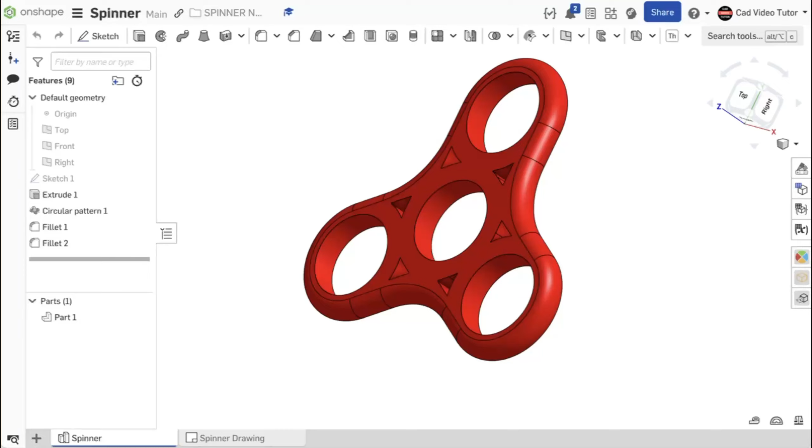This video provides easy-to-follow instructions for you to create this spinner using Onshape.

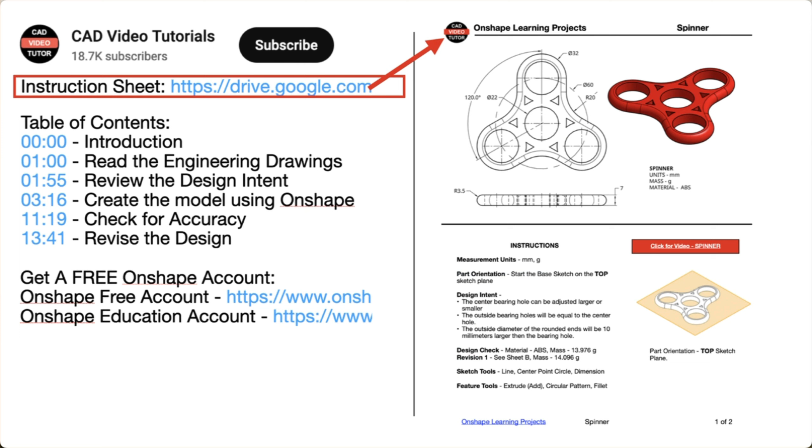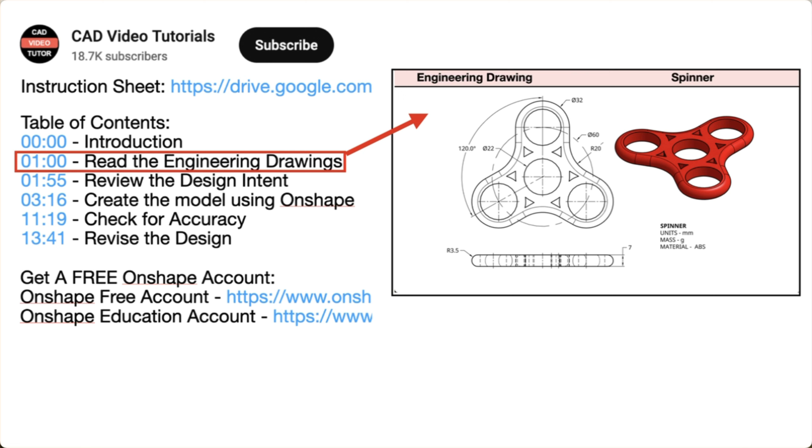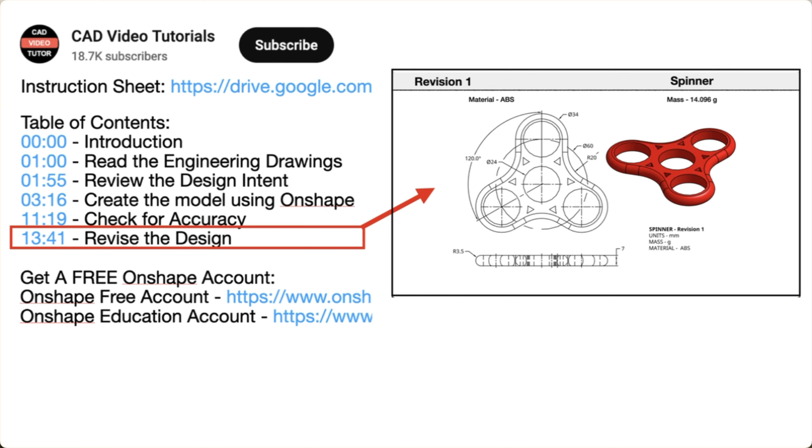The video instruction is organized into 5 segments. In Segment 1, you will read the engineering drawings. Segment 2 will establish the design intent. In Segment 3, you will create the part model using Onshape. Next, you will check the accuracy of your model by checking its mass properties. Last, you will check the design intent by making changes to the model to see if it will update correctly. Now you are ready to begin the project.

In this segment, we'll read the engineering drawing for this spinner. Let's start by identifying the views provided in the drawings. First, there is an isometric view showing the spinner as a 3-dimensional pictorial. Next, 2 orthographic views. On the lower left, a front view. Projected directly above the front view is a top view.

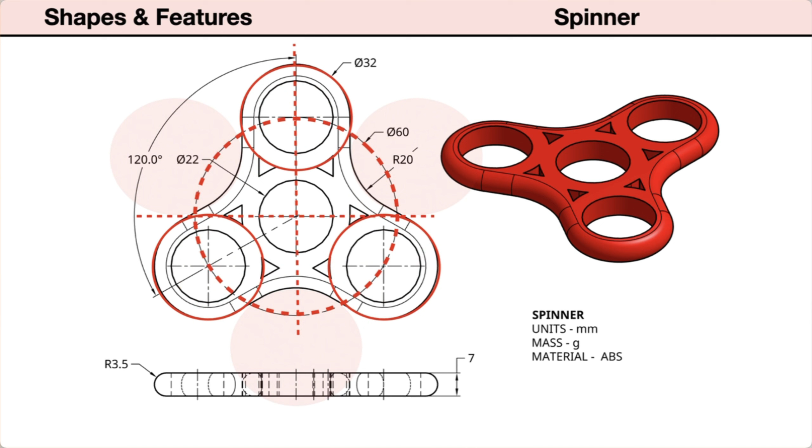When creating the parametric model, we need to identify the basic shapes and included features. The top view shows the part as a circular pattern with features concentric to the center. Located at the center is a circle. Patterned evenly about the center are 3 sets of concentric circles. The outer circles are joined by tangent arcs. The hidden lines in the front view show all of the holes extending through the body. It also shows that the spinner has a uniform thickness, and the outside edges are fully rounded.

Next, we'll look at the dimensions and notes. First, the dimensions are in millimeters. The diameter of the small circles are all 22 millimeters. The outer circles have a diameter of 32 millimeters. The centers of the outer circles are coincident to a center line circle with a diameter of 60 millimeters.

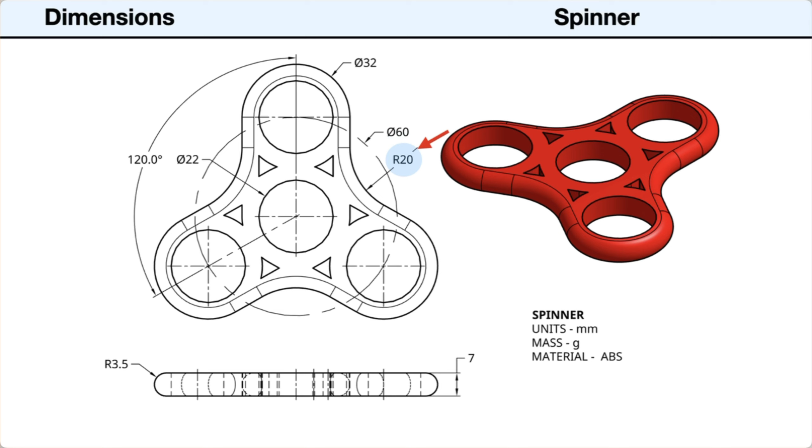The outer tangent arcs have a radius of 20 millimeters. The thickness is 7 millimeters. The fillet on the outside edge has a radius of 3.5 millimeters. The material is ABS plastic. The mass is measured in grams.

Next, let's establish our design intent. To start, we need to identify any features that might be changed or revised during the design process. The center bearing hole is sized at 22 millimeters to fit a standard ball bearing. The outer holes are sized the same so that they can also be fitted with bearings to add weight and momentum for spinning. We might need to use a different size bearing, so this diameter might need to be changed by a few millimeters. This means that all of the bearing holes would then have to be changed.

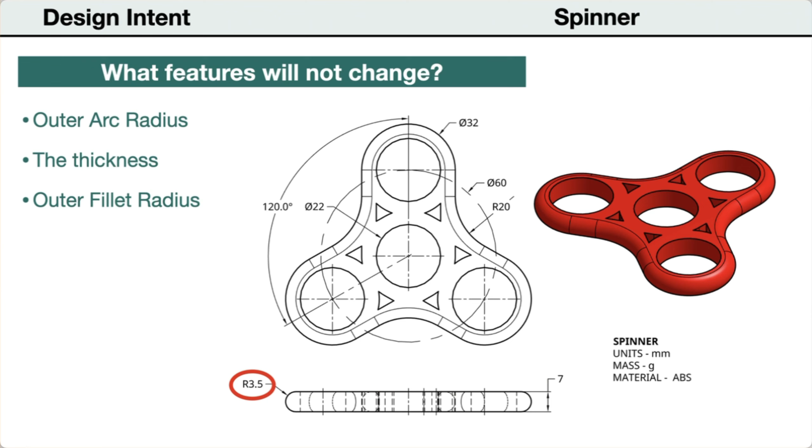If the bearing hole size changes on these outer holes, then the concentric circles would need to change by the same amount. Other features should remain unchanged, including the outer arc radius, the thickness, and the outside fillet radius. So we should be able to adjust the size of the bearing holes, and the other features will update without errors.

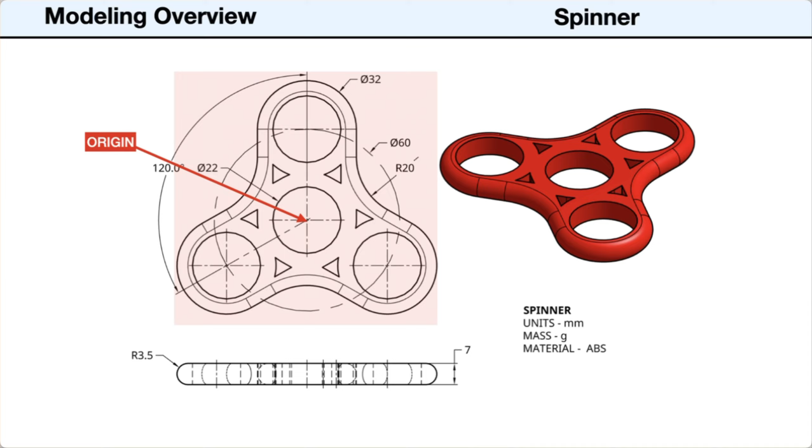Before we model the part in Onshape, let's preview the steps we will use in the modeling process. First, from the drawing, we will identify the profile we will use for the base sketch. In this project, the top view defines most of the elements of the design, so we will use it for the base sketch. Because this part is concentric to the center, we will use the origin at the center of the sketch. So sketch 1 is placed on the top sketch plane and defines the center hole and one set of the pattern elements. Extrude 1 will add the thickness.

Circular pattern 1 will duplicate and add the additional features around the outside. Fillet 1 will add the arcs to the outside. Fillet 2 will round over the outside edge. Now let's get started modeling the spinner.

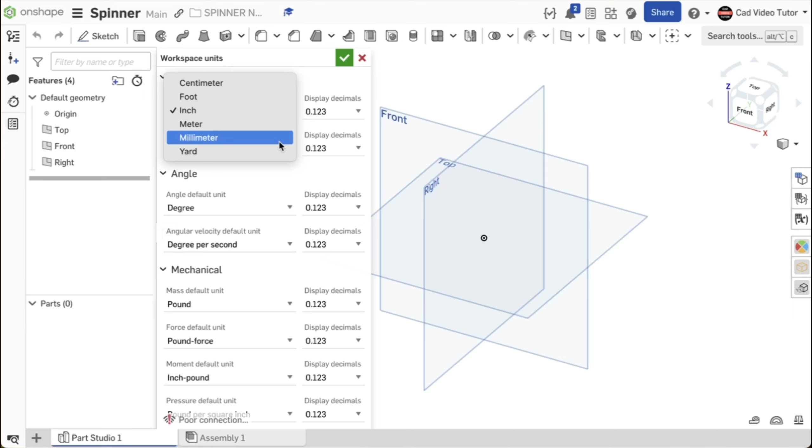I have started a new Onshape document and named it spinner. The workspace units are set to millimeters and the mass is set to grams. Start a new sketch and click on the top sketch plane. Use N on the keyboard to view normal and P to turn off the planes. I will start by sketching a center point circle concentric to the origin. Set the diameter at 22 millimeters. This is the size of the bearing hole.

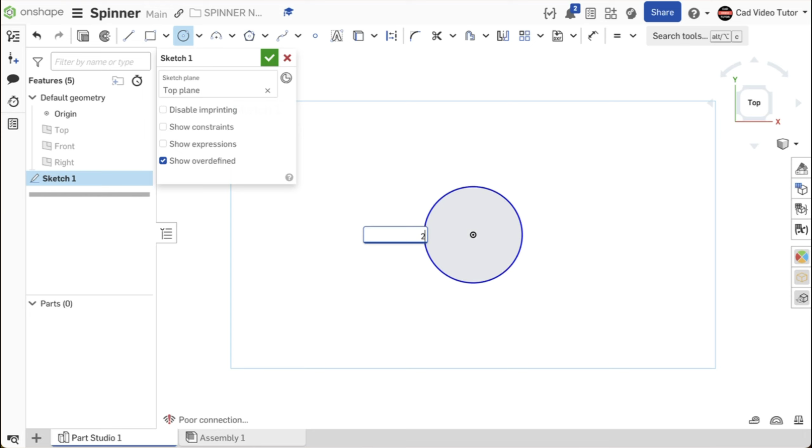Create another larger concentric circle. This diameter is 32, but I want to set its size to change if the inner circle changes. To do this, use the dimension tool and set the distance between the inner circle and outer circle at 5 millimeters. Now, if I change the diameter of the inner circle, the outer circle will automatically update by the same amount. The dimension of the inner circle now drives the diameter of the outer circle.

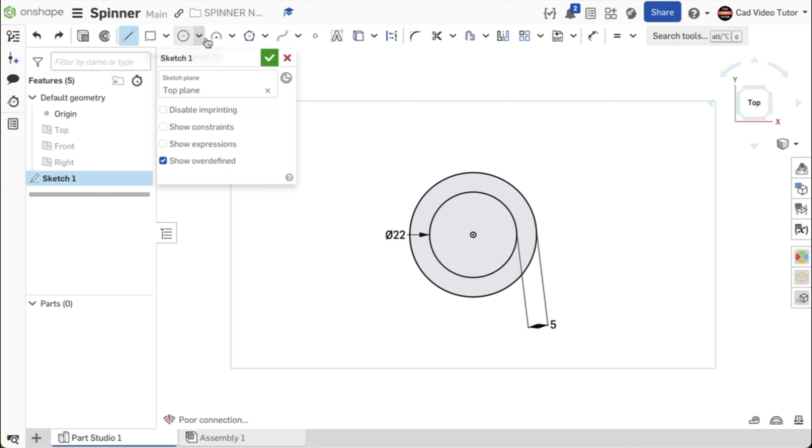Next, use a construction line to set the distance between the origin and the location of one of the pattern features. Make sure the line is vertical. Set the length to 30 millimeters. Now draw another set of concentric circles coincident to the end of this line.

To drive the diameter of these circles with the existing set, use an equal constraint from the constraint menu and click first on the dimension circle and then the outer circle to set it equal. Now, if I change this diameter of the center bearing circle, it drives all the circles. This will satisfy my design intent.

Now we need some single lines. The line should start coincident to this circle and horizontal to the center. I see both icons, so click to start the line. The line should end at the same point on the circle.

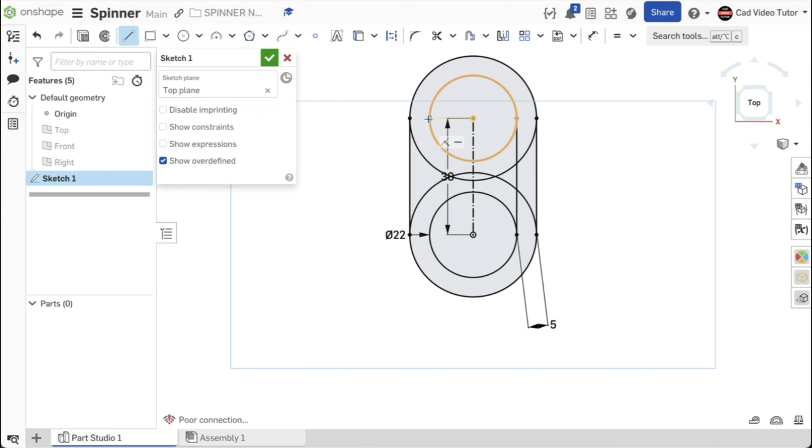If you click and hold the mouse button down, then drag to the line's ending point and let up on the mouse, it draws a single line. This is the fast way to draw separate line segments without having to start and stop the line tool. All the lines have turned black and the sketch is finished. Use the green check to accept.

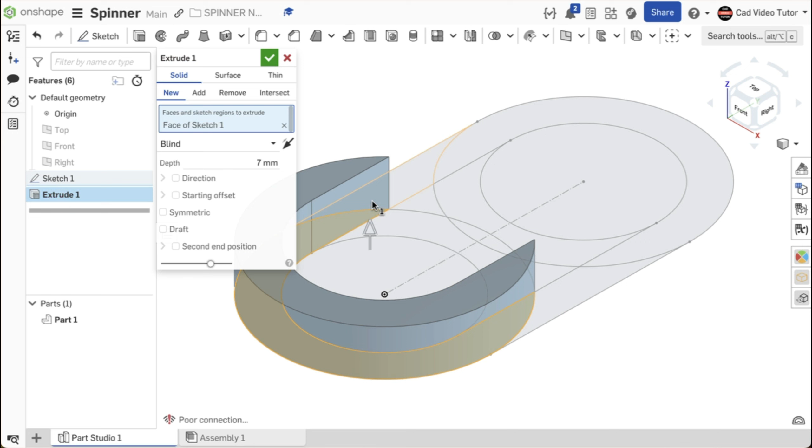Now we can extrude the regions of the sketch to create the base feature. Click on the Extrude tool on the feature toolbar. Set the depth to 7 millimeters. Click on the regions of the sketch that will be included in the base feature. If you accidentally click on a region you don't want included, click on it again to deselect it. This looks correct, so use the green check to accept the part.

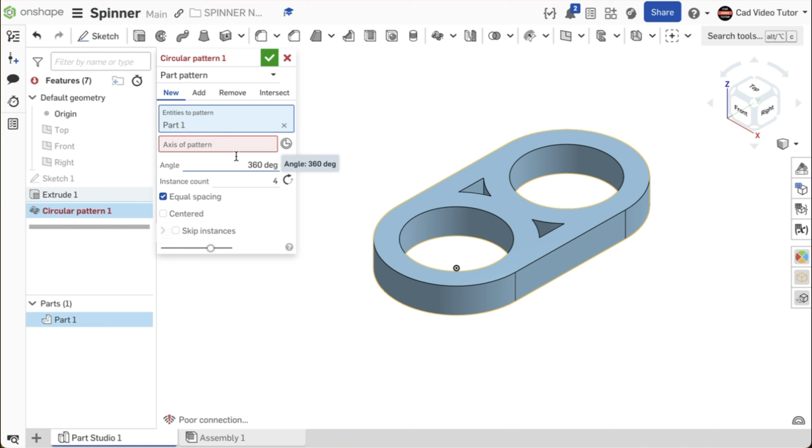Next, we can use a circular pattern to duplicate the base part about the center. From the Feature toolbar, choose Circular Pattern. This will be a part pattern. For the entities to pattern, click on Part 1 in the parts list. For the axis of the pattern, click on the edge of the bearing hole at the center. For the instance count, enter 3.

I can see the parts list showing 3 parts, so I need to click on Add to make sure they are merged into one part. This looks correct. Use the green check to accept.

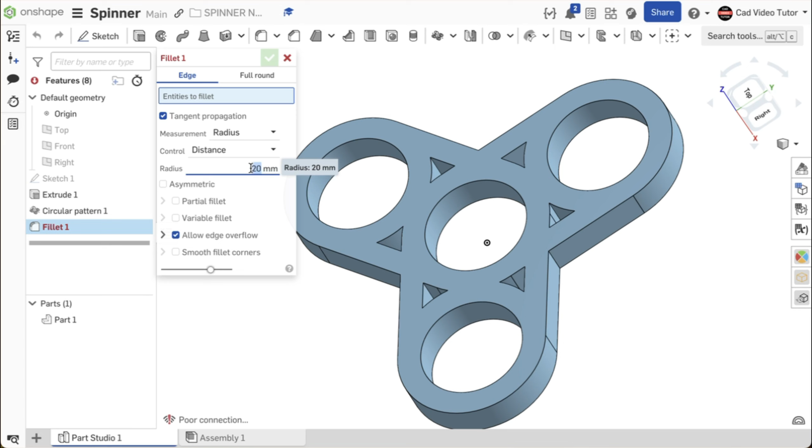Now we can use the Fillet feature to add the arc on the outside edges. From the Feature toolbar, choose Fillet. This will be Edge Fillet. Set the radius to 20 millimeters. Click one of the edges at an outside intersection. This looks correct. Use the green check to accept.

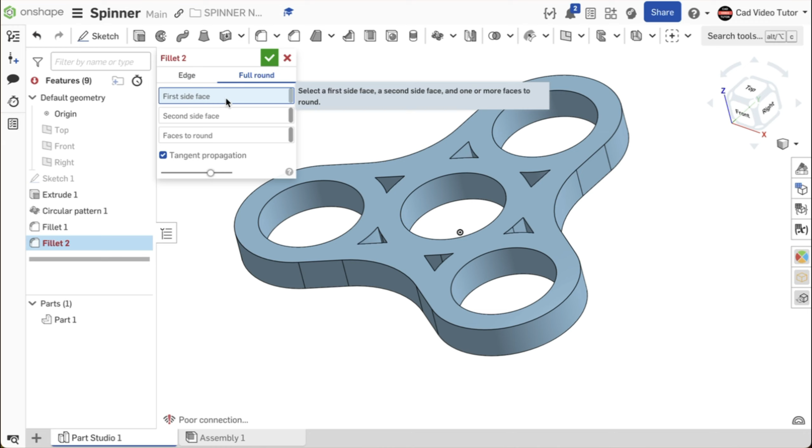We can use the fillet again to round over the outside edges. Again, click on Fillet from the toolbar. This time click on Full Round as the fillet type. This rounds the surface between 2 faces, so we have to choose the faces. Click on the top face and then the bottom face. Last, click on the face of the edge.

With tangent propagation turned on, it will find all tangent faces and create half-round edges. This looks correct. Use the green check to accept. The spinner is now complete.

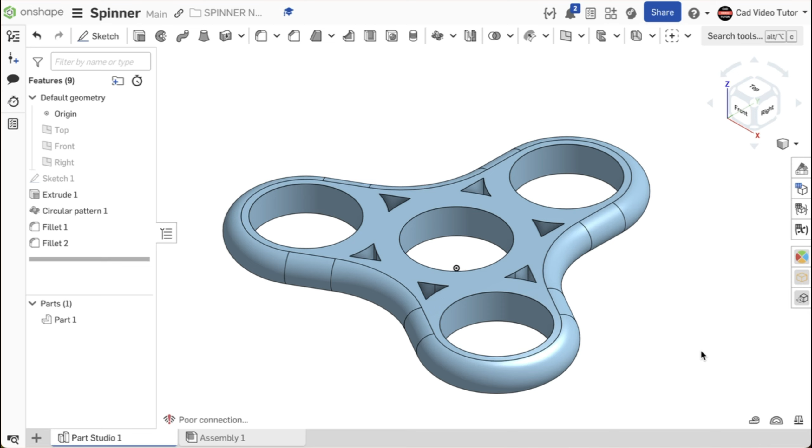In this segment, we'll check the accuracy by checking its mass properties. To check the model, the mass units should be set to grams and the material set to ABS. If the size and shape of your model was completed accurately, the mass should be 13.976 grams. Let's look at this process step by step.

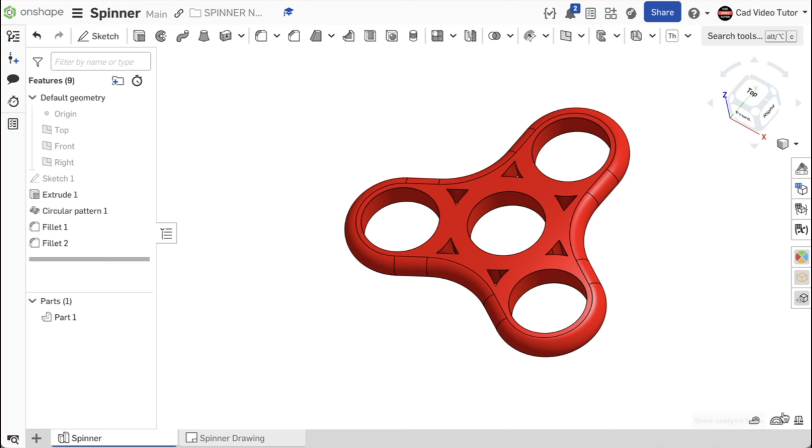First, open the document that contains the model of the spinner. Next, check the workspace units and make sure that mass was set to grams. Next, set the material to ABS. Go to the part in the parts list. Right-click and choose Assign Material. In this case, we're searching for ABS. Click to select it. Next, go down to the lower right corner and click on the Display Mass Properties button.

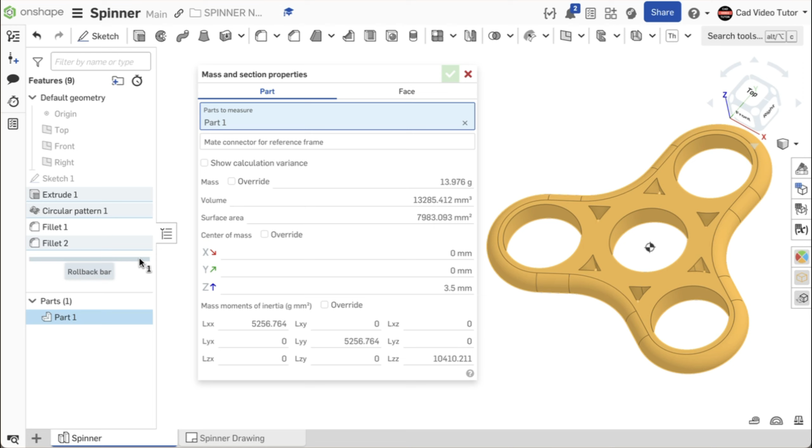When the dialog box opens, click on the part, and the display shows a mass of 13.976 grams. If this was your result, then your part is accurate and matches the specifications. If not, we can troubleshoot to locate the sketch or feature that has an error. First, locate the rollback bar in the feature list. Move the rollback bar up to just below Extrude 1. The mass now reads 7.164 grams. If you have an error here, examine Sketch 1.

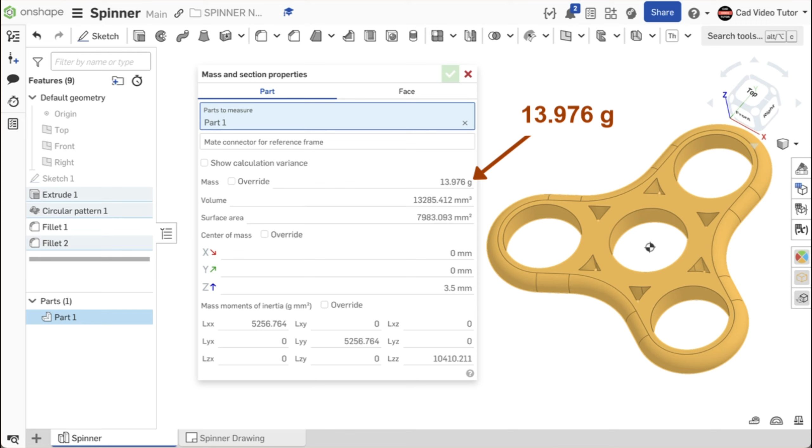Now move the rollback bar down to below Circular Pattern 1. The mass is now 14.962 grams. Next, move the rollback bar down to below Fillet 1. The mass is now 15.437 grams. Move the bar to the end. Again, the mass should be 13.976 grams. If your amount still doesn't match, check Fillet 2 and make corrections. Your part should be accurate and meet the drawing specifications.

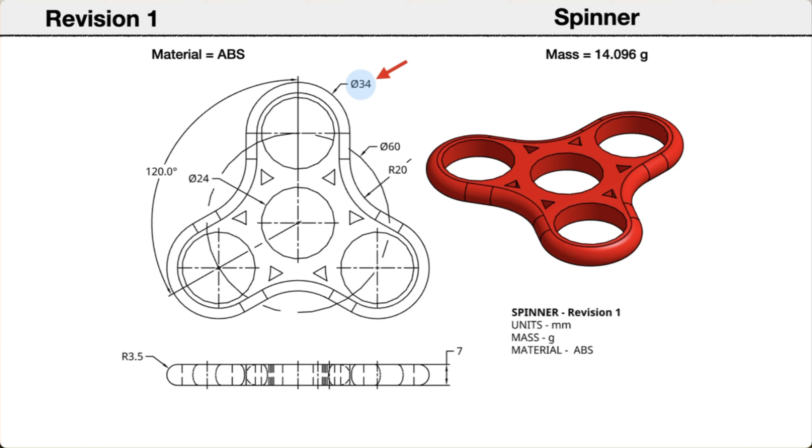In this segment, we will make some revisions to the design and check if our design intent has been applied correctly. We will start by reading the revision drawings to identify the features that will be changed. The drawings show the center bearing hole has changed to 24 millimeters. Also, the outer diameter has changed to 34 millimeters. In the design, the outer holes are set to receive the same size bearings for added weight. In our model, we have set constraints so that the size of the center bearing hole drives the size of all the bearing holes and the outer diameters.

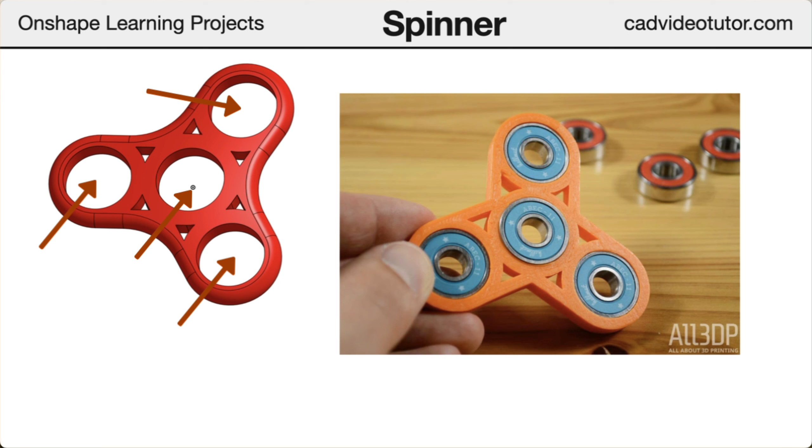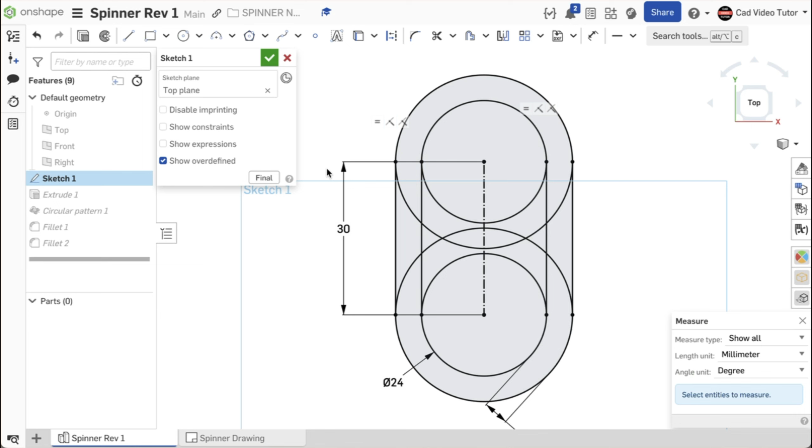To make the revisions, open the spinner document. Open Sketch 1 and change the center hole diameter to 24 millimeters. Use the measure tool to check the size of the outer bearing hole. Yes, it has updated to 24 millimeters. Check the outer diameter. It should be 34 millimeters. The distance between the center and outer bearing holes remains at 30 millimeters. Click the finish button to see the update. This looks correct without any errors in the feature list.

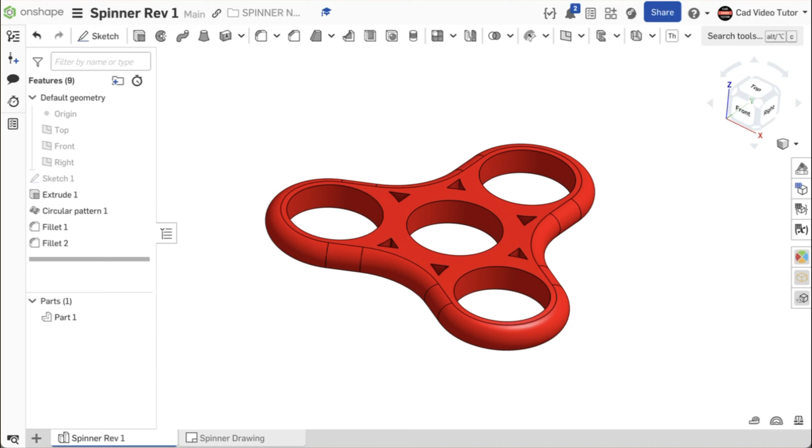Check the accuracy of the revised part by viewing its mass properties. The new mass should be 14.096 grams. If your part updated correctly, the model has met the design intent and it was revised to receive a larger size bearing. If your part didn't update correctly, check constraints used in Sketch 1.